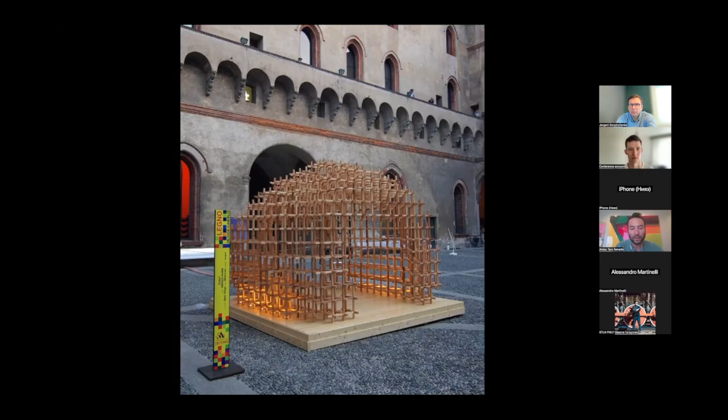So most Japanese joinery is famous for relying just on timber, and using timber allows you to assemble and disassemble the architecture. So the first project I would like to show you is called Chidori, and it was done in Milan for the Fuori Salone in 2007. It is a very small pavilion, but it's a self-supporting structure made of sticks. They are only 3 centimeters by 3 centimeters in section.

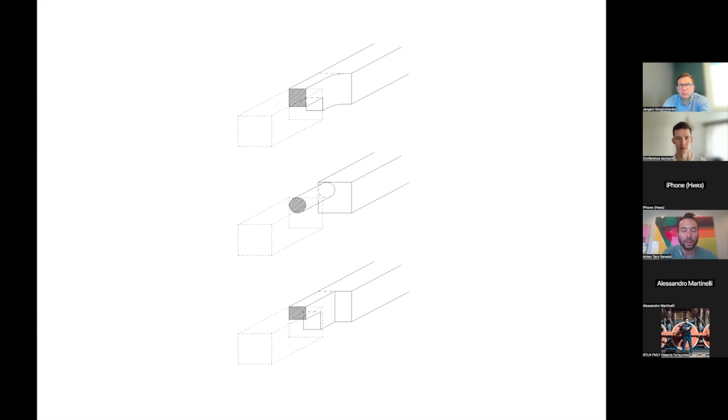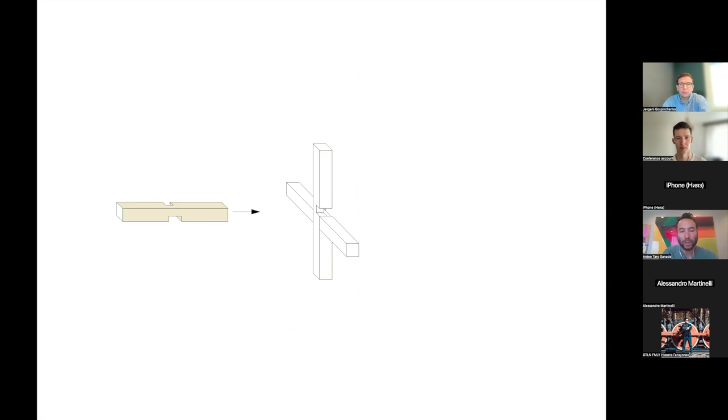And the inspiration for this joint came from the Chidori toys. These are toys that actually also take from the Japanese carpentry system. So they are toys that assemble and disassemble small wood pieces to create small structures. And basically they are made of 3 different sticks joined together. And the peculiarity of this joint is that one of the sticks can rotate.

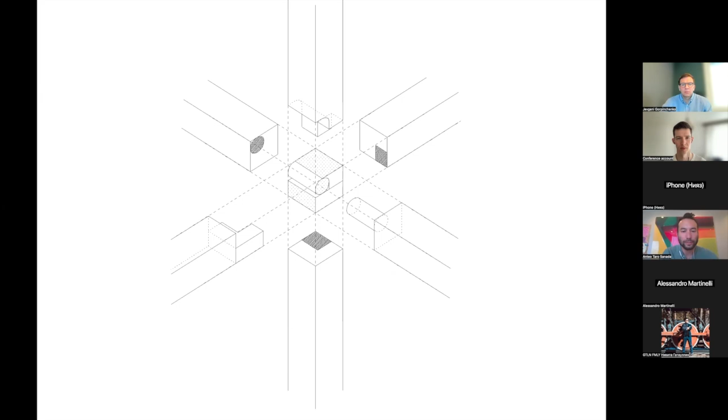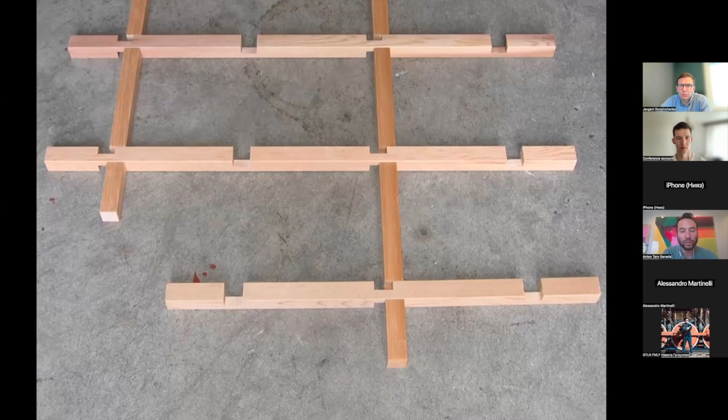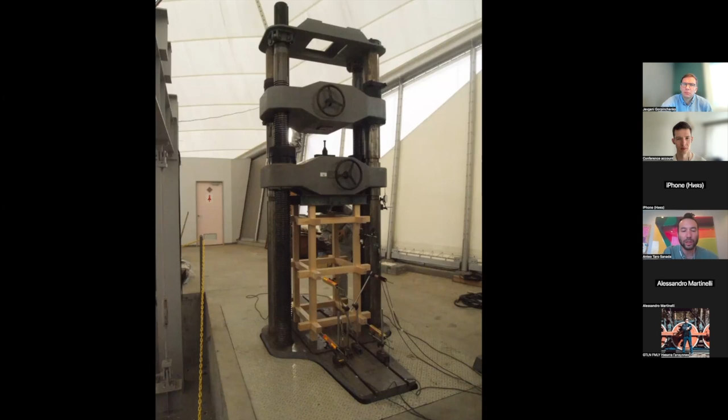And the same joint was then used for a different purpose in a more complex project. So in this case, we're talking about a building, not only an installation. For the GC Museum, we collaborated with engineer Jun Sato, and he tested the Chidori joint until rupture and stated that we needed 60 millimeters by 60 millimeters, so double the size of the original joint.

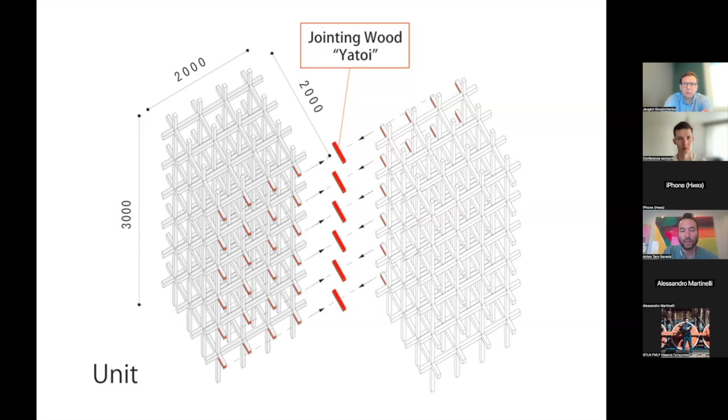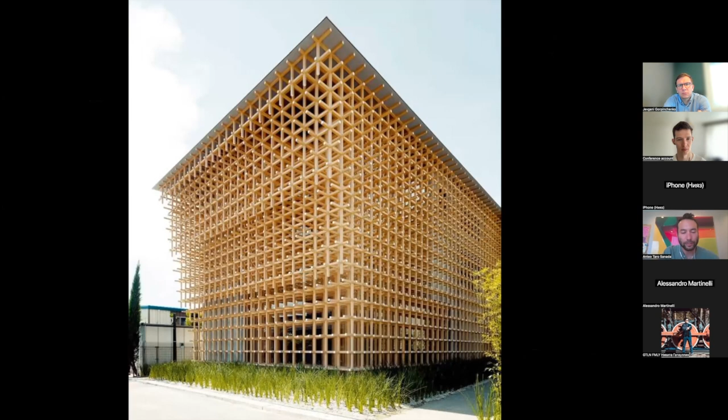But this was still very, very thin and allowed us to create this cloud-like structure that in this case had to support a roof. So it's not only self-supporting, but it had to carry load over it. And this is how the building looks. So the repetition of the same joint creates at the same time the structural system and the facade for this building.

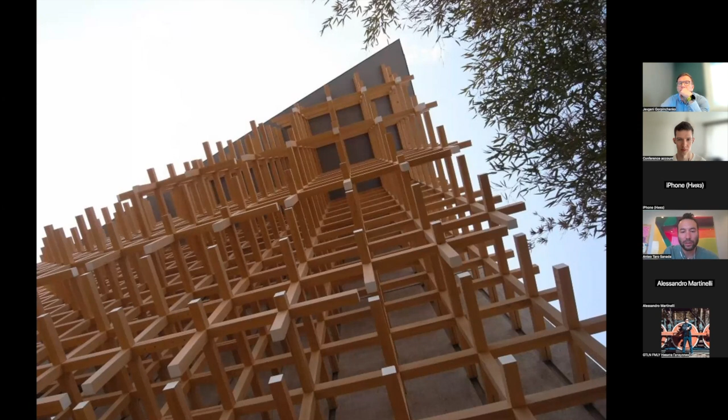And again, it doesn't rely much on nails, apart from some extensions that are needed between one piece and another. And the fact that it was modular and based on a grid also helped for the exhibition inside. So artifacts or objects can be exhibited inside these cells that are formed by the structure. And this is the view from below. As I said, some sculptures can be inserted in these modules. And this is the view at night.

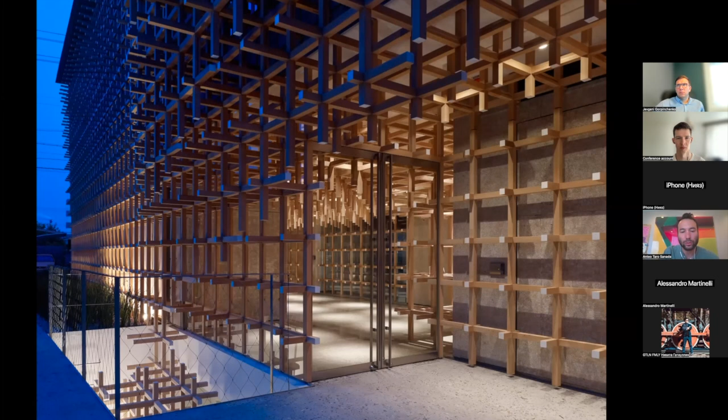So again, this project shows one of our concepts: to achieve beauty by repeating small and simple elements. I think this exemplifies this concept well.

In this case, we used a diagonal grid instead of a perpendicular one. So this was the challenge. The elements are sitting on each other and interlocking in one joint—3 elements interlocking in one joint and then stacked together. We also chose a diagonal grid because it's a very long and narrow plot, and this diagonal pattern helps put into communication the two sides of the building, so it becomes a very long tunnel.

Again, this is a self-supporting structure that is also the building structure, so it supports the roof.

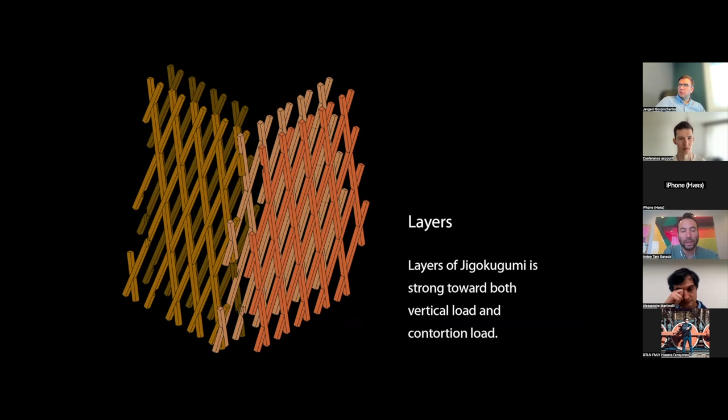I think this is probably one of the first times it was used for a building. Making this joint creates a very solid and stiff system, and this system is repeated in two layers on both sides to form a corner. Diagonal elements are then added, connecting all the different layers and making the whole system work together as one combined structure. This made it possible to hold a slab in between and also the roof on top.

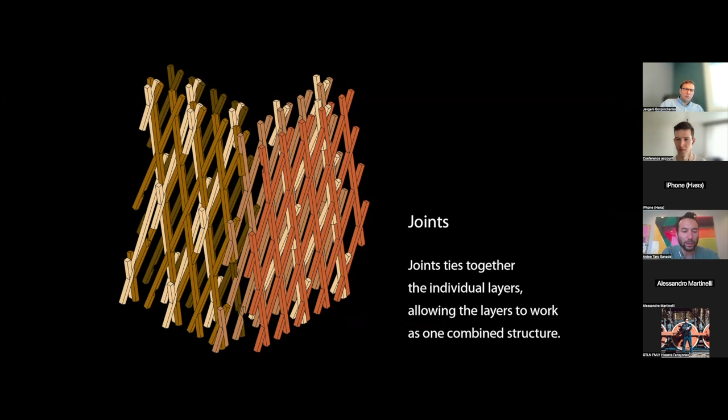Last, I wanted to share a project I was involved with personally, called Botanical Pavilion, done in Melbourne. It was constructed in 2020-2021 in collaboration with an artist called Geoff Nees. This artist came to our office with an interesting story: there were trees that had to be cut in the botanical garden in Melbourne, and he didn't want to dispose of them as usual—he wanted to give them a second life because they were very beautiful and had a lot of value, being hundreds and hundreds of years old. So we decided to build a pavilion to showcase this different type of timber.

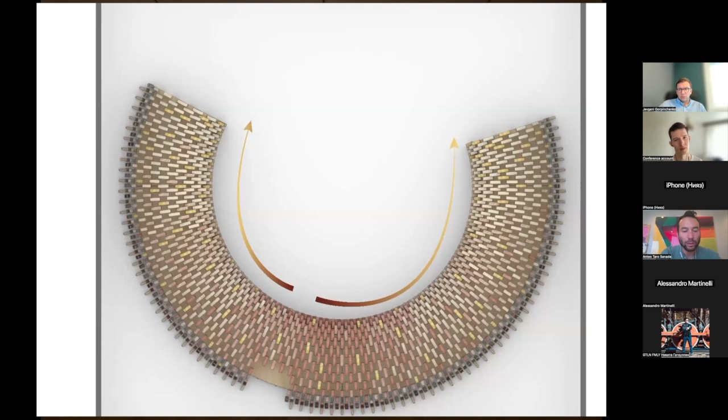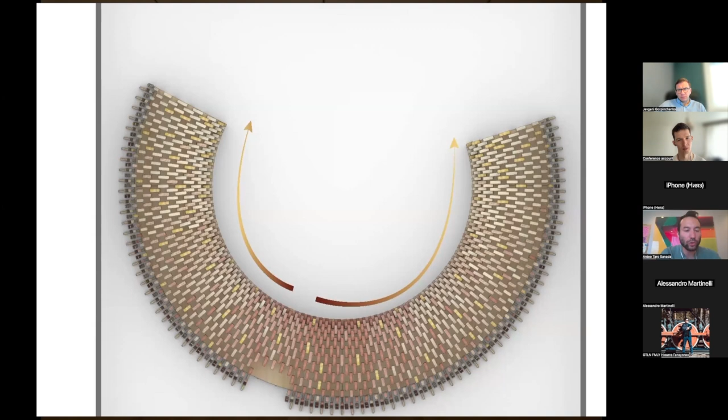And then, after color coding them, we decided to make a gradient using the available wood, from dark to light, to create a journey inside the pavilion.

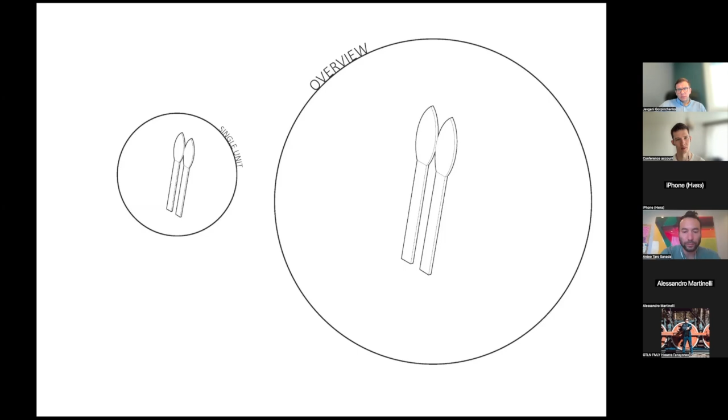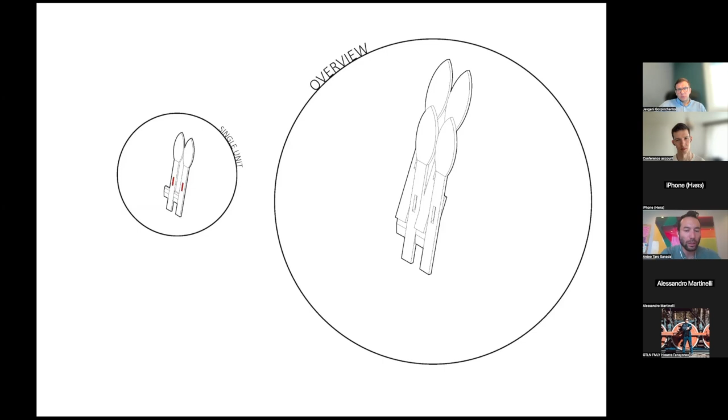Again, it's relying on a very simple module. In this case, it's like a stick with some sort of feather. These modules are joined together to form an H, and then stacked one on top of the other, like a three-dimensional puzzle.

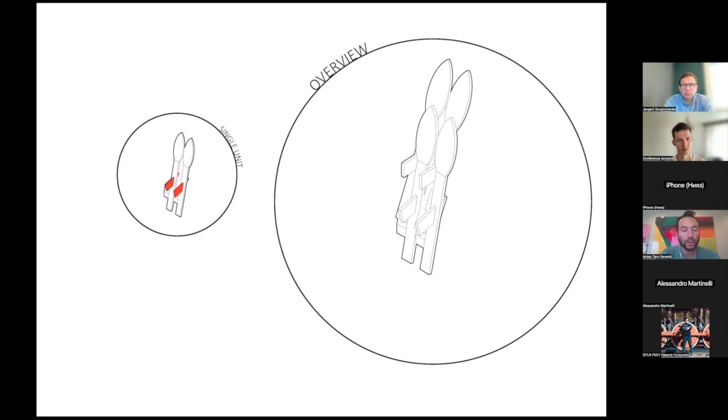After they're stacked, they are fastened by an element in the opposite direction. It's also holding the structure in place, but also used to showcase the timber inside. So we attach the pieces of the botanical timber inside.

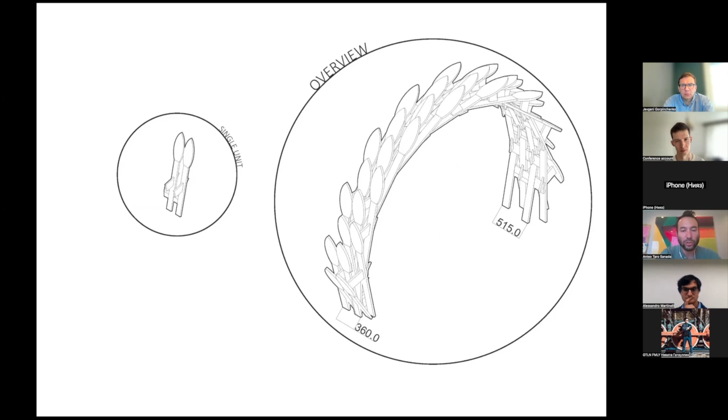Then this module is repeated to form a structural arch, and the arch is again repeated to form a semicircular, a little bit longer than semicircular, pavilion.

The idea was to create a journey that could make people feel they are outside in the woods. In Japanese, there's a word, komorebi, that means light filtering through the woods. So we wanted the visitor to experience that while walking in the pavilion.

Again, we achieved this structurally by collaborating with another engineer, in this case called Ejiri-san from Ejiri Engineers. They worked very hard to determine the best thickness for the wood to allow the formation of the arch while being able to carry the load of the pavilion itself. But it's one element, repeated, that makes both structure and skin.